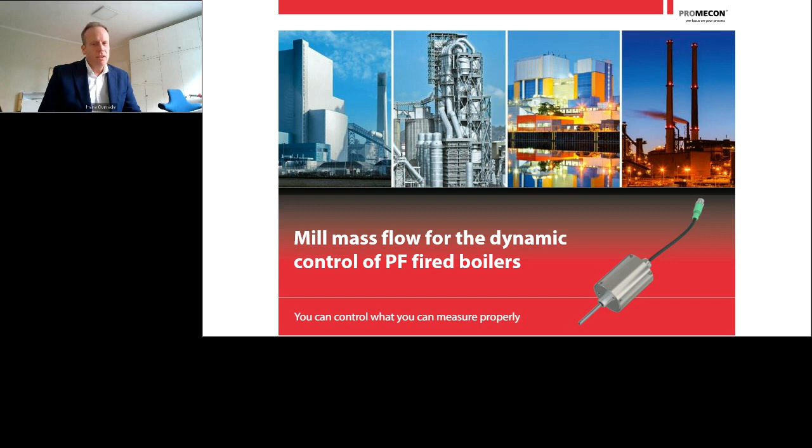Now, as the audience will all be power engineers and power people, you know, of course, that you have a long chain of events before the coal that comes out of your bunker finally turns into megawatts on the turbine shaft into the generator. This chain is a long succession of energy release, and the biggest bottleneck in this whole chain is the pulverizer.

So let's start again with the pulverizer, the focus of so much measurement by PROMECON in the past. I will show you a picture that illustrates this.

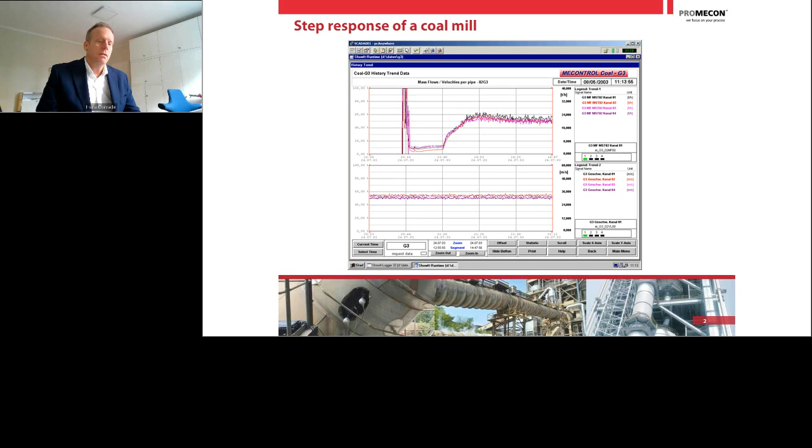Not surprising—you all know this—the pulverizer has a certain circulation of coal, so not all the coal that leaves the roller table will exit the pulverizer. Much of the coal falls back, will be ground a second time, sometimes even a third time, before it leaves the pulverizer. So any step change you make with the feeder has a delayed response in the pulverizer.

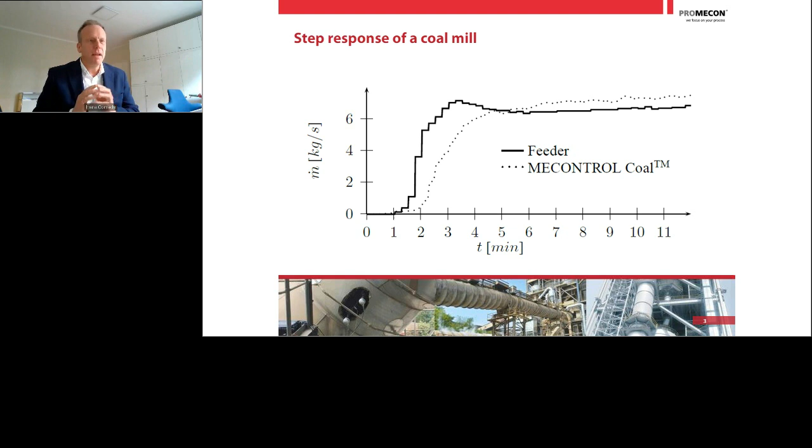That is our main theme of today's discussion. The second theme I'm going to talk about is better pulverizer control in itself, which is also a matter of better controls. So let's start.

Now it all starts with the measurement. If you do not measure the output of the mill, you have no chance to optimize any of it, because you don't know when the coal is coming out. For this, we have developed a measurement system that I have talked about last time. For those who may not have seen my presentation, I will briefly repeat how we measure coal flow, so we're all on the same page as to the measurement technology.

So we have sensors on each of these coal pipes, and our measurement system is capable of measuring the coal mass flow out of each coal pipe. In each coal pipe, we have a coal flow consisting of a certain coal concentration and a certain coal velocity. The concentration times the velocity is the coal mass flow. This is what our system is measuring.

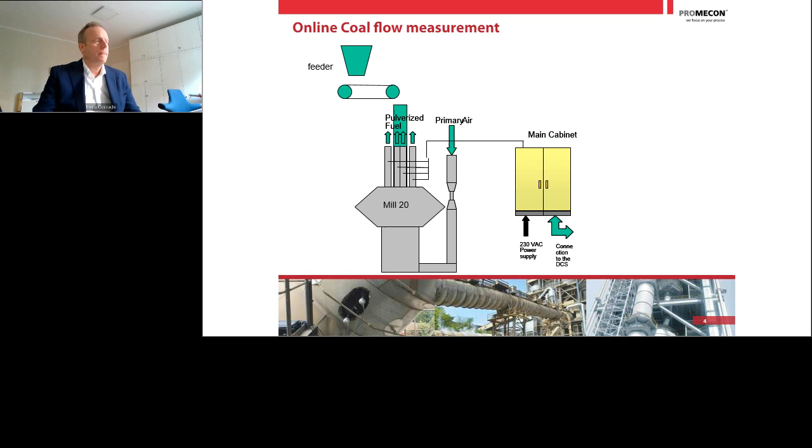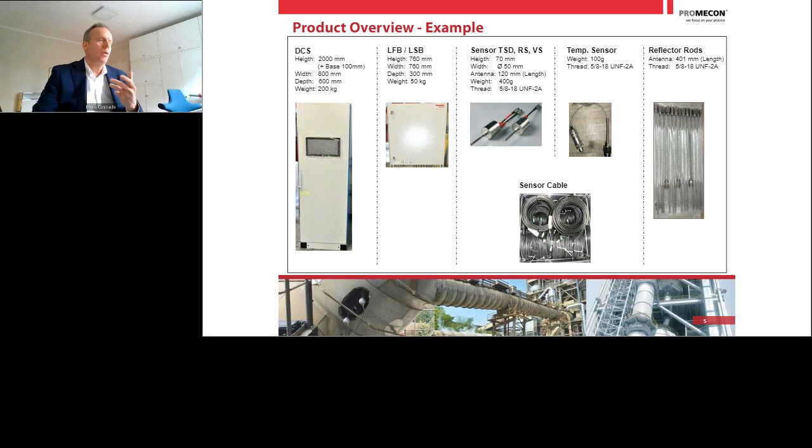How does the system really function? How is it measuring? Our system has two distinct types of measurements incorporated. The first one is a so-called microwave measurement, which allows you to measure the coal concentration in the pipe. The second measurement inside our system is a measurement of coal velocity, done with an electrostatic charge measurement that is correlated between two sensors.

If you now add coal into the pipe, or biomass dust, or any other fuel, that resonance frequency will shift down to slightly lower frequencies. So the change in resonance frequency is directly proportional to the amount of material concentration in that pipe. You double the concentration, you double the frequency shift; you triple the concentration, you triple the frequency shift. So you can see which pipe has a high loading and which one has a low loading.

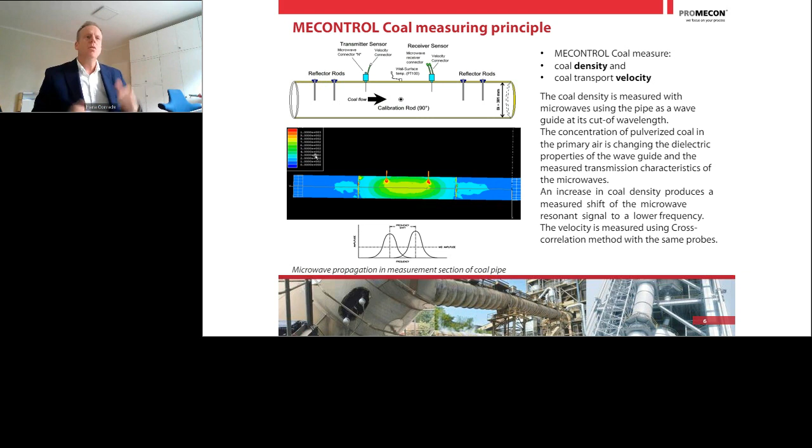Of course, we also need to know how fast the material is flowing through the pipe, and we do this with what we call electrostatic correlation measurement. We have two sensors, as I explained before, that we use for microwaves. These same two sensors we also use for the electrostatic measurement, but now with a different principle.

We are looking at the electrostatic charge on sensor 1 and sensor 2, and we can see a certain electrostatic charge on each sensor. Now, if you imagine certain clouds of particles flying through the pipe, they leave a certain signature on the first sensor - a certain time signature, a certain pattern.

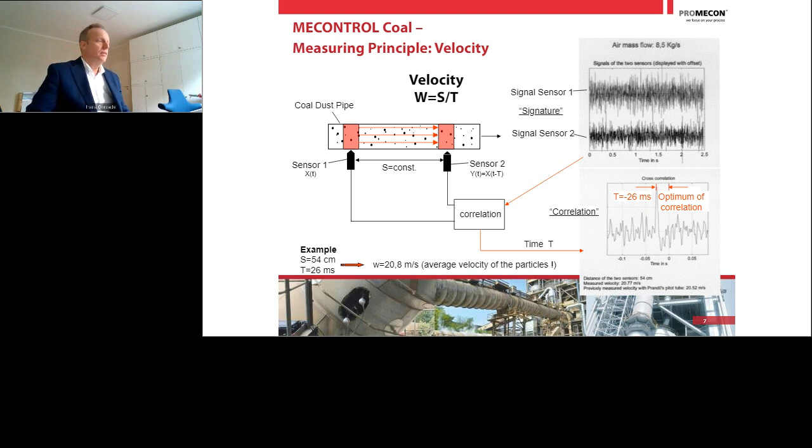Let's have a look. First of all, here you can see a picture of a typical measurement. On the bottom you can see the velocity out of the mill, transport velocity. Last time I mentioned how important transport velocity is in order to avoid pulsations and other problems and deposits. This time we're really focusing on mass flow, and on top you can see the mass flow.

Again, when you look very closely, when the mill starts on the left hand side of the picture, can you see the velocities coming up like flicking on a switch, instantaneous on the lower picture? And on the higher picture, the mass flow is not coming on instantaneous. It takes some time, it has a certain incline. There is a certain time delay before the mill really puts out the coal.

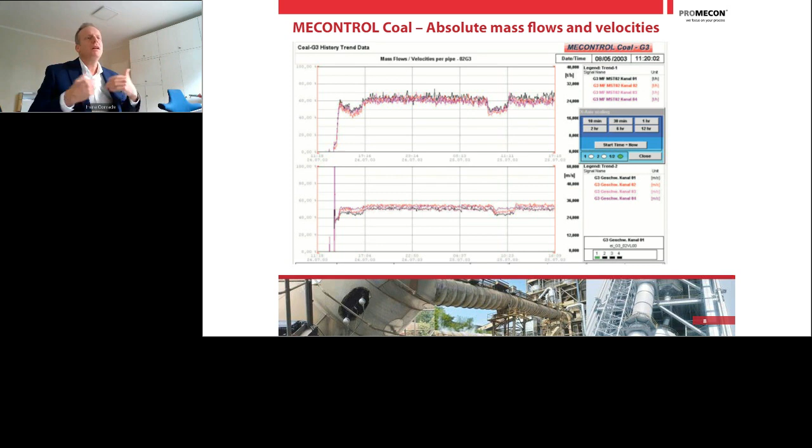So this gets me to the first big part of the session. What can you do with this? And I would like to give you the situation in Germany.

Typical for Germany is the big portion of renewable energy that we have in our grid. And wherever you are in the world and listening, there are still markets where you have lots of coal and not many renewables. But be aware, I think globally renewables will take a bigger portion of the electrification or electric production.

And the bigger the portion is, the more destabilized the grid will become. If you have a grid with 100% coal or gas or whatever, and you add 5% renewables, not much is happening. If you increase from 5% to 10%, you will see some fluctuations in the grid. Why? Because sometimes the wind is blowing, sometimes the wind is not blowing. Sometimes the sun is shining, sometimes it's not shining, and there can be very abrupt changes between the wind blowing and the wind not blowing. So if you increase the amount of renewables in the grid and you push down the conventional, your grid will be more and more destabilized.

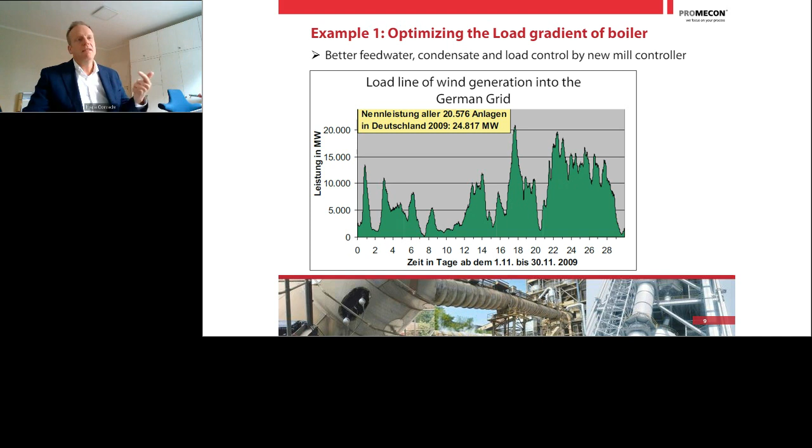You have to make out of your plant - your plant is a large ship, a huge tanker, and you have to make it a racing car. How do you do that? How do you change this? When you look at this, you have to look at the time delay, the dynamic behavior of your plant. And this has a lot to do with your pulverizer. So let's look at this.

Again, the picture that you've seen before, you start the feeder, but of course the output of the mill is not there, right? Every control engineer knows this. In every control system of a power station, you have PT elements in your controls that have a certain time delay, right? So every Siemens, ABB, or whatever Foxboro control system has these elements.

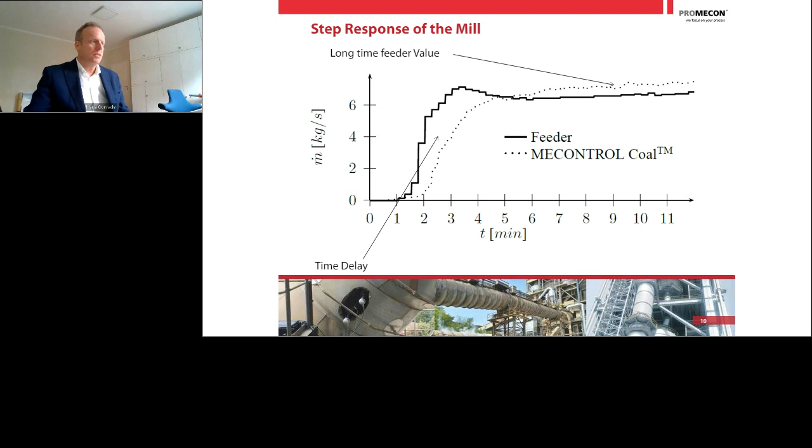So when you turn on the feeder, the control system will have a feed-forward control to the feed water pump, with some time delay. Now what you want to do, however, is accelerate this. You want a faster primary frequency control, a faster secondary frequency control, and of course a higher load flexibility. How do you do that?

Well, the big thing here is you have certain reservoirs of energy in your power station. You have the coal that becomes combusted fuel, then the enthalpy of your boiler, your steam, and also the condensate that comes down from the turbine. And you have the preheaters, the low pressure and high pressure preheaters. So there are a lot of points where you can suck out energy, where you can delay preheating in order to ramp up the load.

And the only important thing is you have to know when the coal will really come out of the mill in order to support your load gradient. If you go into a steep load gradient by, for example, slowing down the condensate pump, you have about 50 seconds that you can suck out the enthalpy of this process. And after 50 seconds, you have to be sure the mill can deliver what it needs to deliver, because otherwise you become unstable and you get load swings.

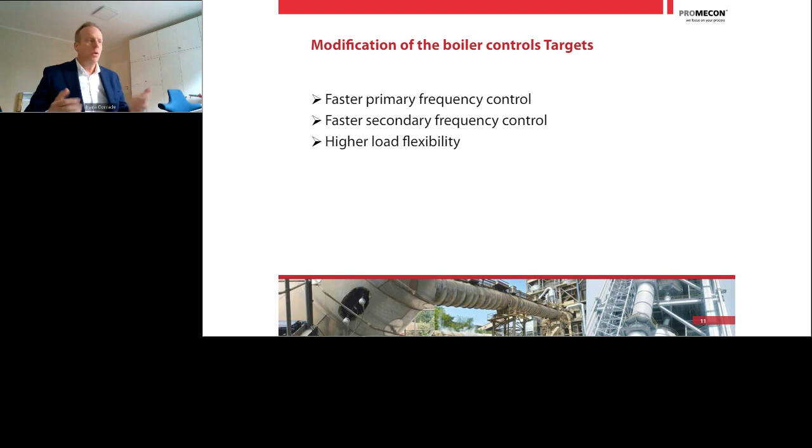I'm going to show you that in a minute. What you can see here is what I've described earlier.

You have the input to your feeder, the load input, and then a main controller that changes the feeder. Then, of course, you have a certain time delay before you can change your feed water pumps. There are a lot of feedback loops that control temperature and pressure, so everything is feedback controlled. But the feed-forward control needs some time delay.

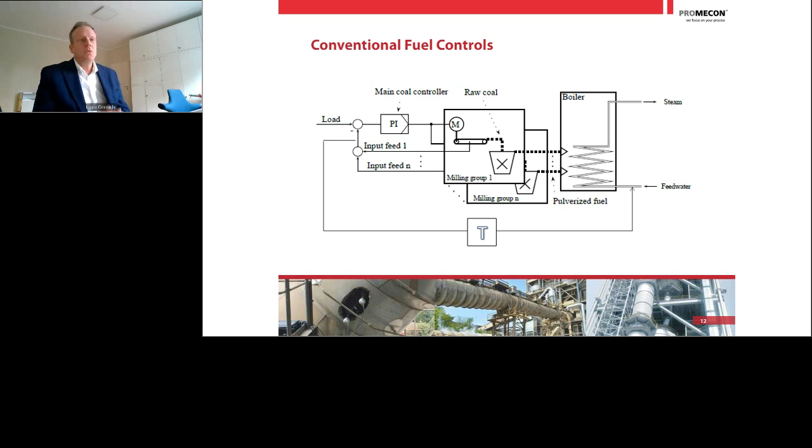As you all know as mill engineers, the time delay of your mill is not constant, and that's the big problem. Sometimes you have a good coal that grinds fast; sometimes you have a bad coal that takes longer to grind. So you can't say after 3 minutes my mill follows — sometimes it follows after 2 minutes, or only after 1.5 minutes. But when will the mill really spit out the coal? No one really knows, and that is the point we need to address.

So what we are really doing to make the boiler faster is we want a real-time measurement of the fuel into the boiler. That means we have to measure between the mill and the boiler. Nobody is measuring this online until we install this new online system from PROMECON. This is a new way of measuring coal mass flow.

We want to use this measurement to modify the mill controls for faster load swings, to ramp the mill up faster, for example by using roller pressure or primary air, to really push the coal out faster when you need it.

Of course, we want to use it for much better synchronization between fuel heat release and feed water control, because you want lower boiler stress and a much better match between the heat release and the feed water. Then you can use the condensate pump controls for faster load gradients.

All the condensate is preheated by steam. So if you have a load gradient, you can say, I'm not going to preheat my condensate because I have a reservoir of condensate, so I wait for that for a few seconds. And during that time, I'm using all of the steam to put it on the turbine as fast as possible. If you do that, with a cascaded control of your water-steam cycle and the fuel parameters, you can ramp up your unit much faster.

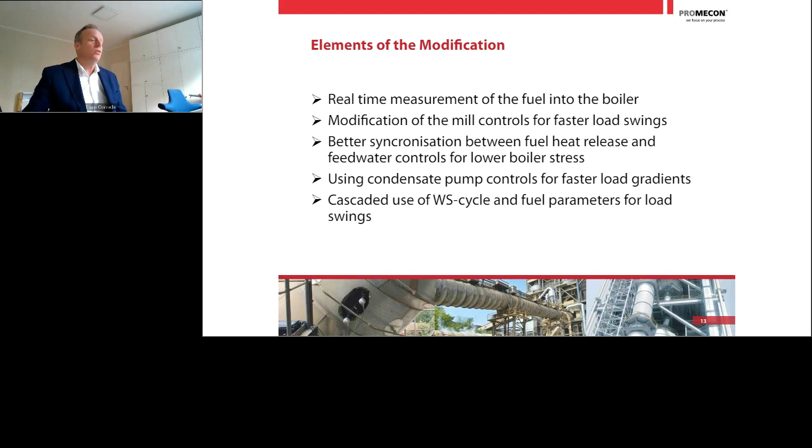So the target is to obtain the instant fuel flow rate and also to understand the dynamic properties of your pulverizer in order to increase the complete control chain up to your load control.

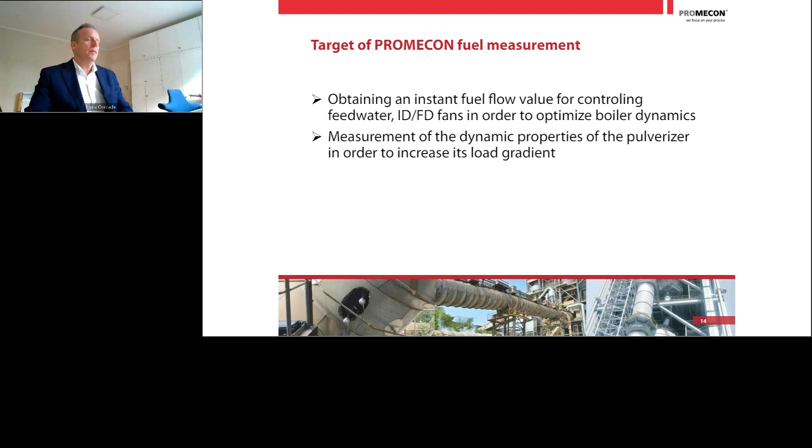So in very crude terms, what we are doing is looking at what goes into the mill, and measuring what comes out of the mill. We put this into an observer, basically a state controller, and this state controller automatically adjusts the transfer function of the mill. Transfer function means how fast an impulse going into the mill comes out of the mill. That transfer function is essential to control feed-forward parameters such as feed water.

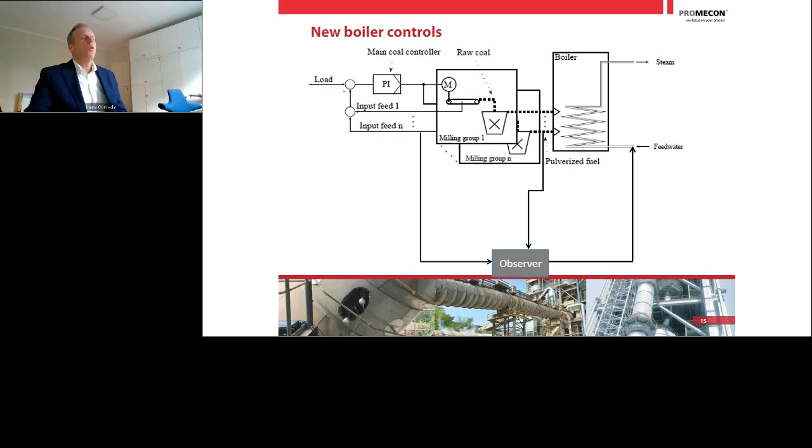Usually what happens if you control this by an advanced state controller, you have a reference model and an observer, and the reference model will continuously be adjusted to the transfer function that you see on the mill. This allows you to predict when the coal will come out of the mill by using the state controller, and you will use the online flow measurement continuously to correct that observer and the reference model.

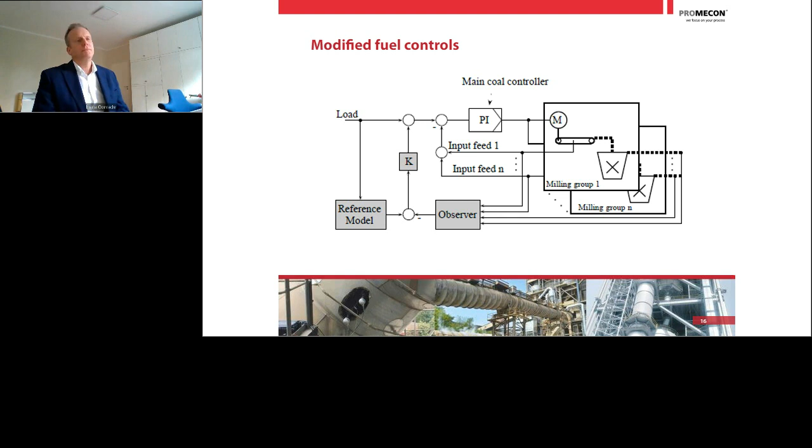Just a little bit more detail on that. I hope it's not too theoretical, but in the real world it's very, very powerful. Let's look at this very simplistic model again of the advanced mill controller.

On the left-hand side, you've got this mass coming in from the feeder, the ṁ_rc. This is the mass flow that's coming basically from the feeder belt from the bunker into the mill. On the top right-hand side, you can see this variable ZPF. This is the measurement that comes from the PROMECON measurement, really saying this is the amount of coal that is coming out of the mill.

Now, what this model is doing is first of all comparing the two, but it also does another very important thing: it looks at the constant and the dynamic value of both inputs. You can use this model to value the dynamic and the constant value independently.

So the output, which is at the lower right-hand side, is the MPF with this little line on top. The MPF is what the mill controller model gives out as the actual value that's coming out of the mill as a prediction. The feeder is really used as a dominant static value, whereas the PROMECON value is used as the main dynamic value, and this is very, very important.

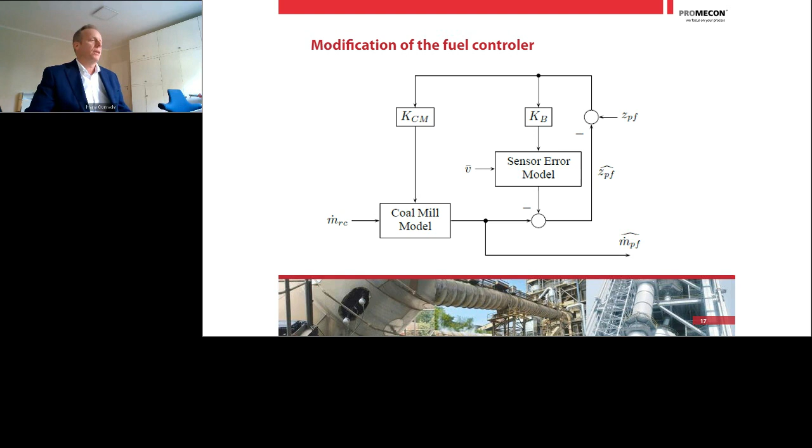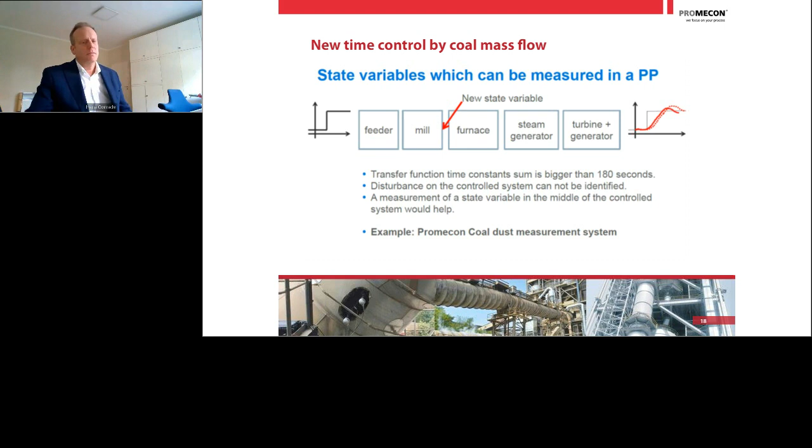And this allows you to optimize the whole chain of events from the feeder input to the turbine generator output, because all the other time variables are very small. Let's look at this.

You have a control - this is very complex. I'm not going to bother you too much with this, but you have a very complex control algorithm for your boiler. This is really controlling the boiler by feeder.

And what we are doing now is adding a second branch where we give a second input to controlling the condensate and also the feed water pump, in order to accommodate for the corrected fuel flow measurement to the boiler and have a much better feed forward target when ramping the boiler up and ramping it down.

What does that help? That helps a lot in making the transition smoother, making it possible to have a steeper transition from low load to high load and back. There's no more effective way than measuring the coal flow in order to optimize and speed up the control of your boiler.

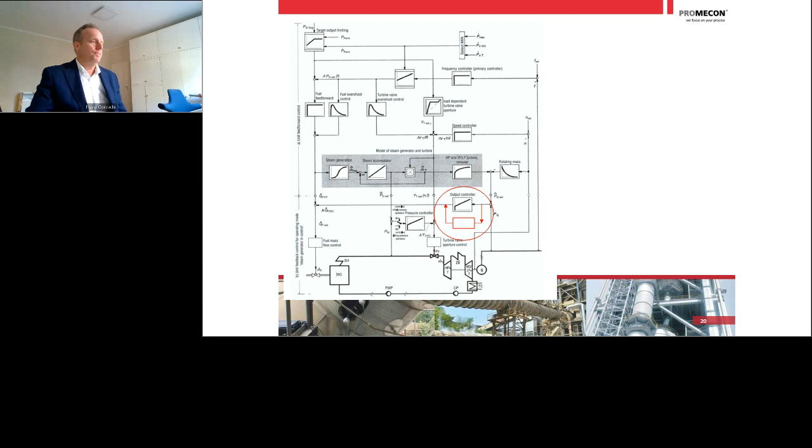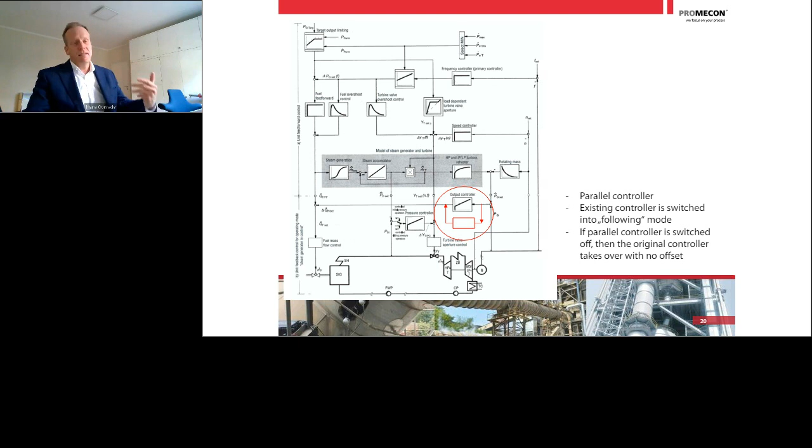So you have a parallel controller, a branch that can be switched on and off, bump free of course. You can switch this control feature on and off, so you can run the boiler as you have been running it before, but you can also enhance its dynamics by using our measurement.

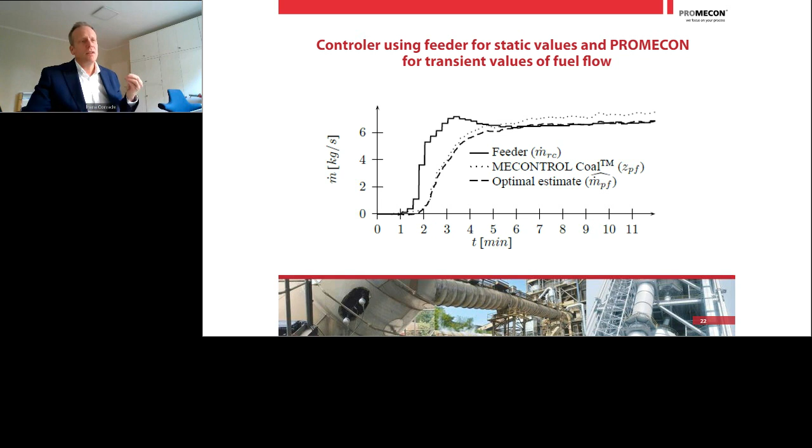So you can use this measurement to directly control the boiler. We've done this in many applications, and it shows that the whole process runs much better than before.

This has been published in a paper by Uniper Technologies in 2017 at PowerGen. If you want this paper, just write us an email. We were going to show you what we presented. We got a best paper award for this work in enhancing coal-fired stations for faster load change.

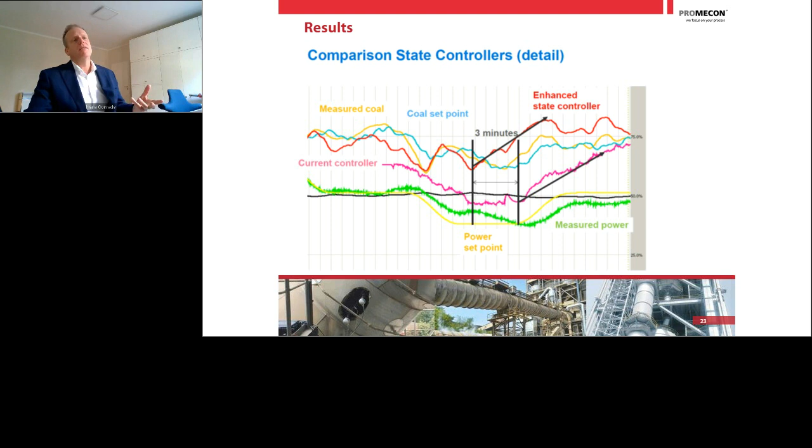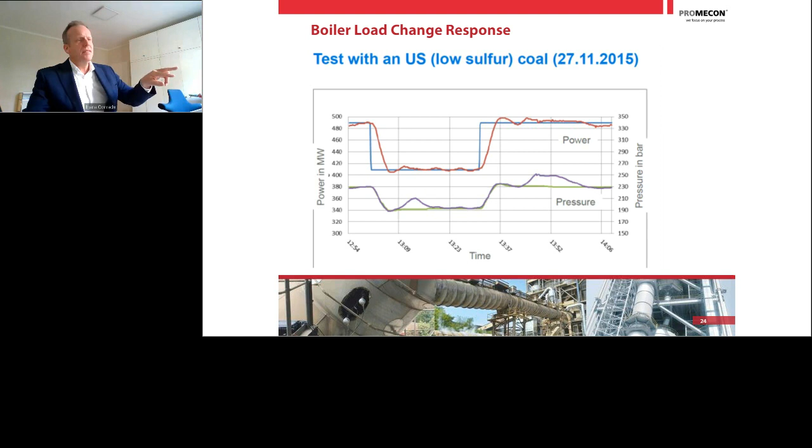Here again an example, we toggle back and forth. One day we did not use our controller, and you can see the blue line is the set point going down and up again. Then the red line and the purple line show how the pressure and the power are following. So this is without enhanced control, and this is with enhanced control. If you toggle out, you have this; and if you use the coal measurement with enhanced control, you have that outcome - a much more smooth transition in high load changes.

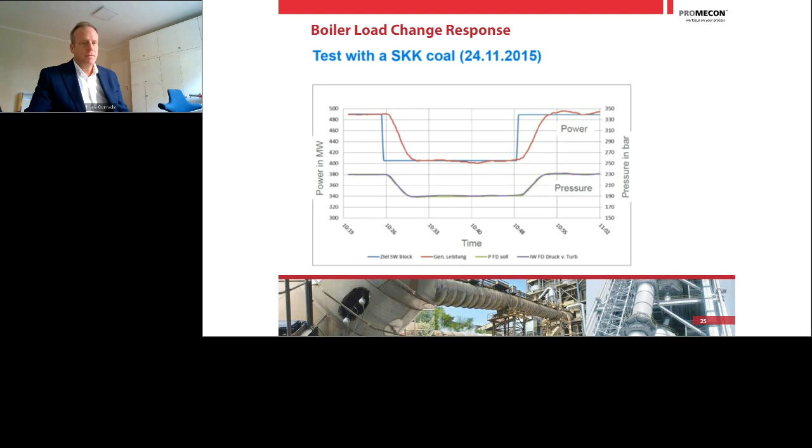So this was how to optimize a complete boiler with our PROMECON measurement and a controller.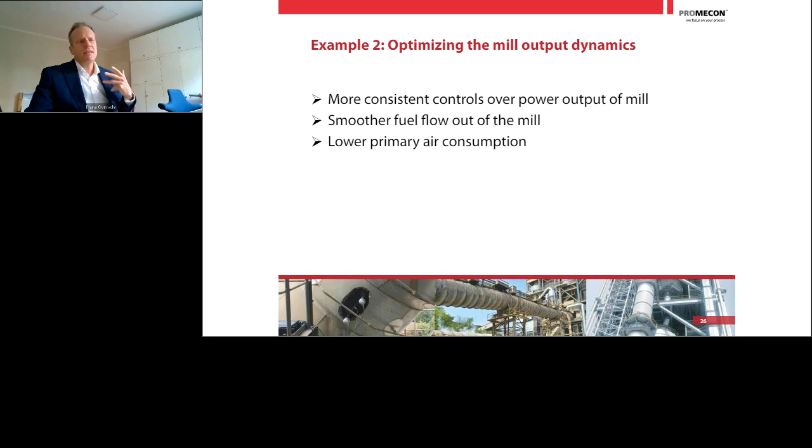I would like to show you now a second example. This helps you control the mill behavior by itself. How can you make a mill behave better than now? Many power plants, whether using coal or biomass, have fairly big problems controlling their mill dynamics by itself. I would like to give a few examples of how we have optimized mill output using our measurement system.

Again, the basis is a state controller - so you have a big controller. Now let's look at the parameters we use to optimize the mill itself. In this mill controller, we take in the PF demand from the power station, the mill DP, the mill outlet temperature, and the measurements - these are all the set points: the PF demand set point, the mill DP set point, mill outlet set point, etc.

And then, of course, we're taking the actual values - the mill DP, the outlet and inlet temperature, the feeder speed, and the coal flow that we measure out of the mill and the PA flow that we measure into the mill.

On the outlet, we have the feeder speed demand - this tells the mill what the feeder should do. So this controller is not only looking at something, it's making a change in the mill controls. It's also giving out a PA demand signal, a cold air damper demand, and a real-time PF flow estimate. With this controller, you can tell the mill what to do. You can control the internal mass of the mill, the level in the mill, and how fast the mill should ramp up or down, within the limits of the mill's operational envelope.

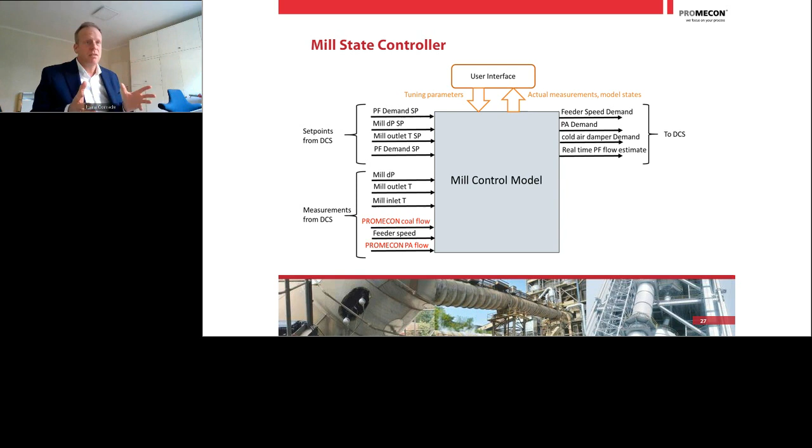So here we have an actual picture of such a controller, and let me explain the individual points. The more interesting part is on the bottom of the picture. You have the dark blue line, which is basically the PF flow demand - this is the demand of the PF flow.

So the boiler's overall controller wants a certain fuel demand, and then you have the feeder flow demand. The PF flow demand is a signal of how much coal you want in your boiler. The feeder flow demand signal is that purple line.

And then you can see this light green line, which is very, very noisy - that's the PROMECON measurement, the real-time measurement of the coal or PF coming out of the mill, or the biomass coming out of the mill. Biomass is a big, big issue when controlling mills properly.

Now, when you see this signal, many people from Siemens and ABB have told us this signal is so noisy, I cannot control anything with it. But the signal is noisy because the mill is pulsating. This signal is no artifact, it's a real pulsating signal out of the mill, and you can use it to control the mill properly.

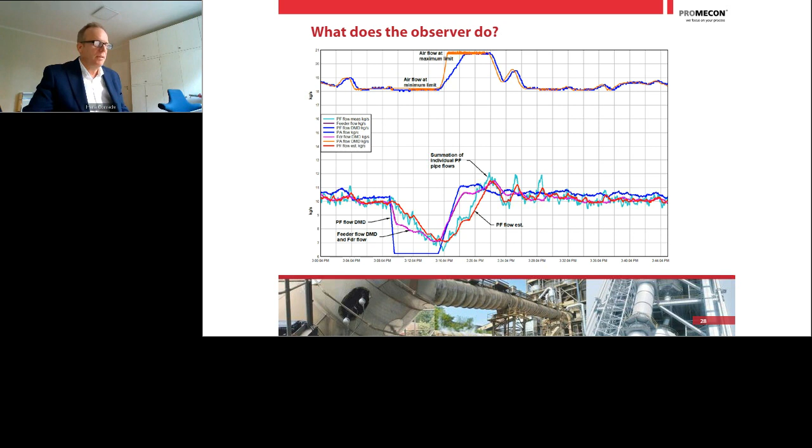Let me show you what you can see here. For example, the feeder flow demand goes up, and of course the feeder flow goes up, you can see that purple line. And then the mill reacts much more slowly. The mill reaction has a big time delay, and this is exactly what you can see.

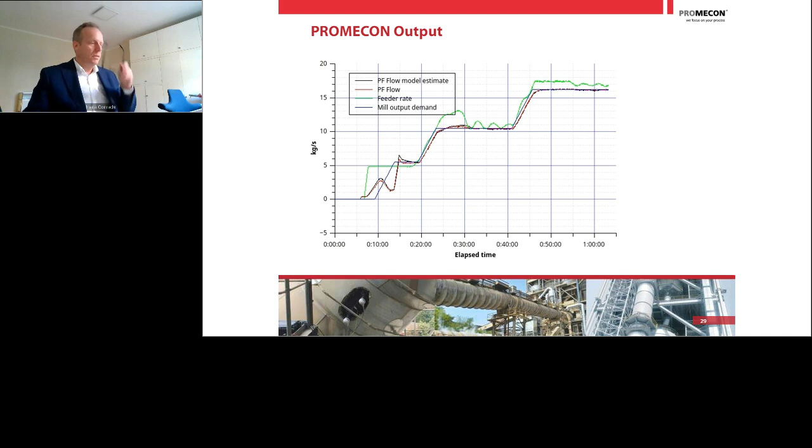Have a look at this. This is real data from a plant in Denmark. It was part of a big paper that was presented. The people at that power station took our online measurement and also a state controller in order to predict the real output of a mill.

They then did the following: they said we have a problem when we change mills, when we take one mill out and put another in. It should be done so the transition is nearly constant, so whatever you take out should be put in, the total mass flow and energy release in the boiler does not change. What they noticed is when they take one mill out and put another in, there's a huge disruption in the boiler heat release. You can see that on the evaporator outlet, the temperatures have huge disruptions.

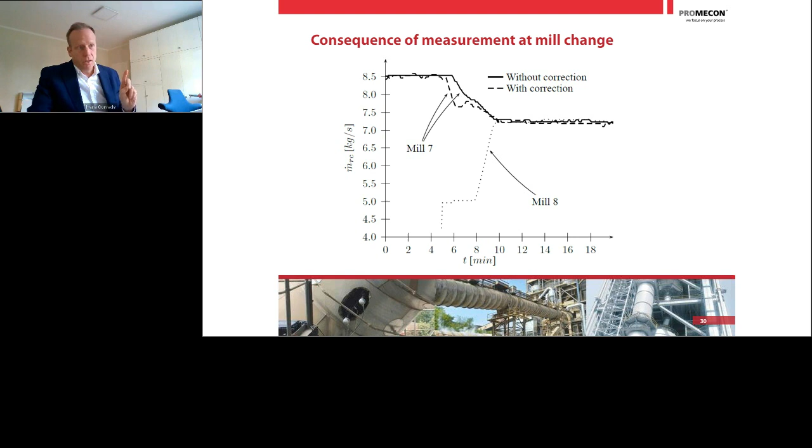So you can make mills behave far more predictable. You can make mills work far more like a gas burner or an oil burner, and you can take out the element of surprise. When will the coal come out of the mill? Depends on the coal, depends on the biomass, depends on your fuel, depends on your mill.

If you have a worn out mill with worn out tires, how do you do this? If you have a state controller, you can control the airflow, you can control the feeder, you can control the roller pressure. The roller pressure is a big tool to make the coal come out of the mill fast or slow. If you increase roller pressure, the coal will immediately go out. If you release it, the mill will store in more coal. So you can use the mill as a buffer in order to have the output as constant and as predictable as you want it. Let me show you some more results of that.

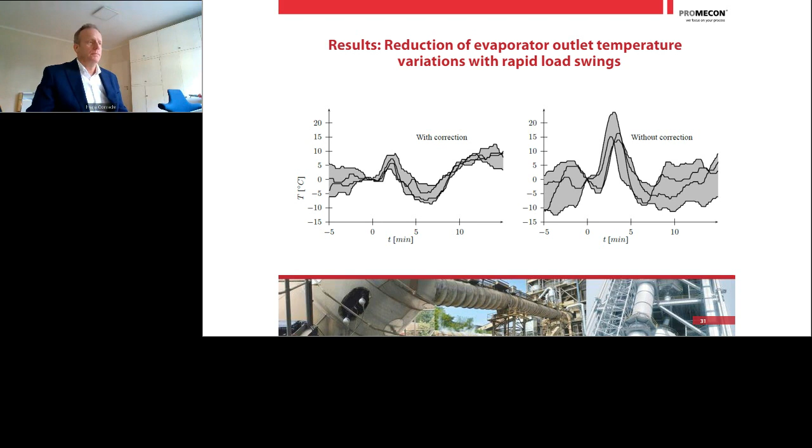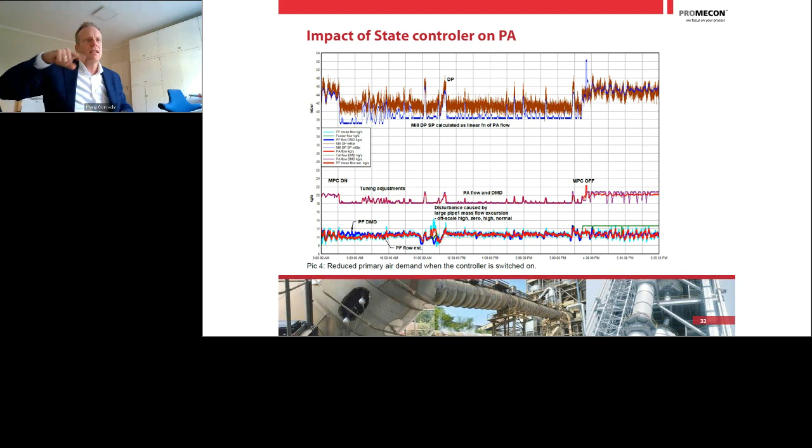And this is exactly the thing. People believe when they have a flat feeder to the mill, the output of the mill is very flatlined, it's also very smooth. But that's not the case. When you switch our controller on, the feeder starts to move and the output becomes far more stable. That's a very, very important point in stabilizing mills.

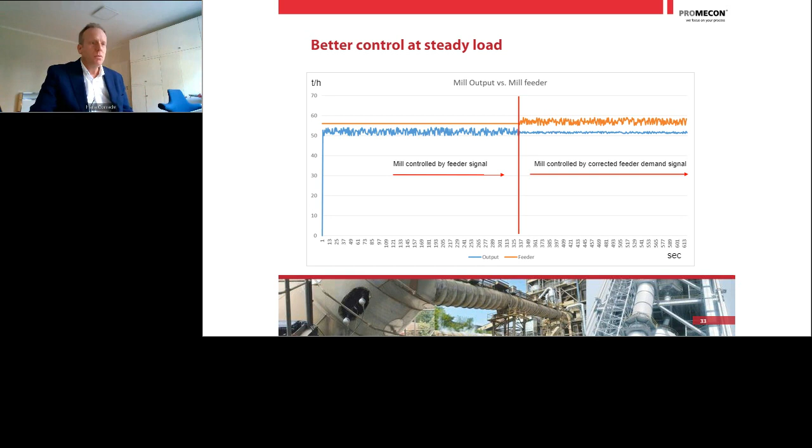Now, this is, of course, theoretical, this is just the model. What is the real data? The real data looks like this.

Again, on the left-hand side, feeder control, there is no controller of PROMECON active. And you can see the output is all over the place, it's very dynamic, it's pulsating. And then the controller is switched on, and all the flows become far more flatlined, become far more stable.

So this helps you to cultivate your output. Why is this important? Let's jump back quickly to the presentation that I did a few months ago. If your mill is not constant in output, but your mill is pumping the coal like this all the time, how can you control your combustion? How can you control your NOx? How can you control your CO? The burner will always pulsate up and down.

And this is what we see in many power stations in this world. We can see the output fluctuating, and the operators say, this is impossible, the feeder is completely constant, how can your output fluctuate? I don't think the measurement is correct. When we first installed our measurement with a controller, we could prove, switch it on, you can see everything becomes more stable, much more stable.

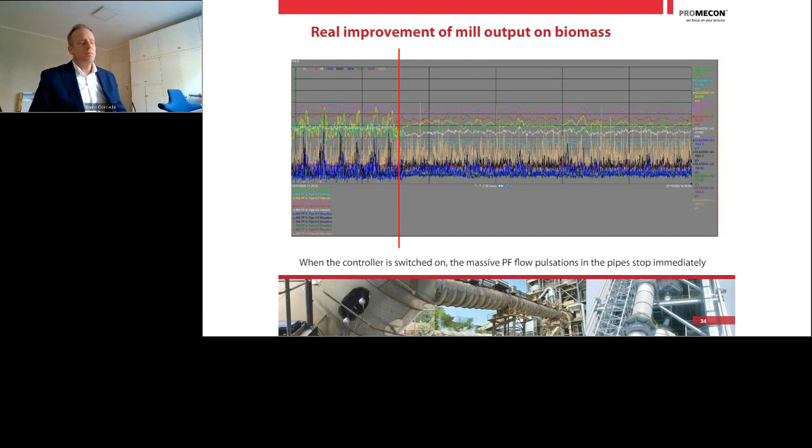This is, of course, also a function of the bed depth of the mill changing. When the controller is switched on, the bed depth is used to smooth out the output of the mill, and the output becomes much more predictable and flatline. So this is actually what we can do with this controller.

We have mill stability, and we can reduce coal output fluctuations, especially in biomass. This is a very critical thing. We've done a lot of biomass projects in Scandinavia, we have a very big one in the UK, and we also did biomass measurements in other parts of Europe. It's always a PA thing - you need high PA velocities. We could prove that with a good controller, you can reduce PA velocities.

You can reduce PA air demand, and therefore also have much better controllability of biomass-fed mills. You can increase load swing, and also make your mill more stable at low loads. Why is that important? Of course, minimum load. If you have so much renewable energy pushing into the grid, you don't want to take the coal power station out, but you want to run it as low as you can, keep it at a low level, because getting the power station offline, getting the turbine cold and everything, that is a huge loss of money. So you want to run the boiler as low as you can. And what is the limitation for that? Of course, mill stability. The more stable you can make your mill, the fewer oil burners you need, and the better you can cope with low load generation periods.

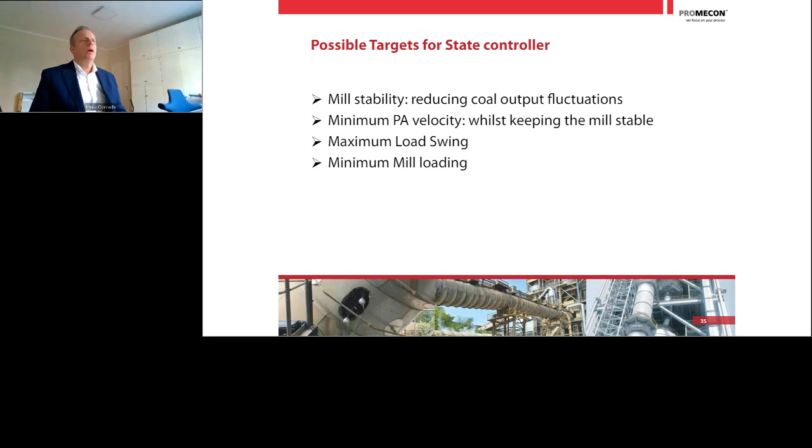Okay, that's basically what I wanted to tell you. I hope you enjoyed this one. This certainly is a bit more rocket science than last time, because we're not looking at static imbalances - this time we looked at full boiler load swing of the complete unit. By the way, the unit you see in the picture here is the first boiler load swing unit where we did this with Uniper Technologies. It's been very successful. And the second part I talked about was making your mills behave better, making them more consistent in fuel output and more predictable in changing mill load.

So I hope that you have taken something out of this. I can imagine that there will be quite a few questions. We'll be happy to answer all of your questions. Any questions I cannot answer in this session now, since we have only a few minutes to answer questions, we will take your questions and send you an email response, and we will certainly give you some more information on the work we have done in tuning boilers dynamically to accommodate more renewable energy into the grid. Thank you very much, and I will be happy to take questions from you right now.